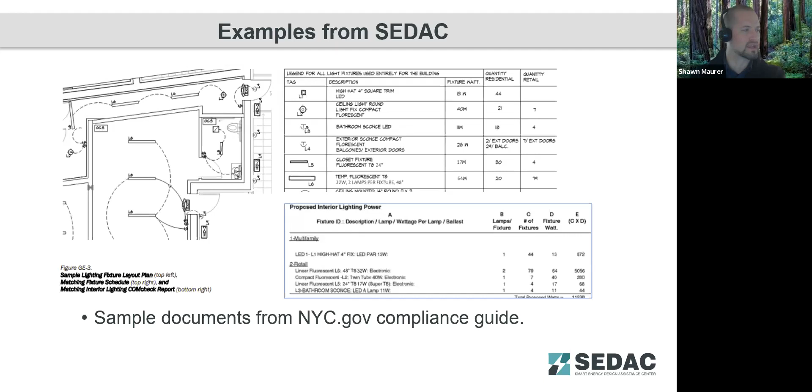This example comes from the New York City's building department. They have a manual that shows a lot of examples of code compliance documentation. In discussing beforehand with Don and Nelson about examples of documentation compliance, we've commented on the resources at New York City where they provide these examples are probably one of the better resources out there for finding good examples of documentation compliance. We have another example here of just envelope wall assembly where they've done the U value calculation, and again showing what their calculated UA is, what they're allowed per the code, and just showing, right there on the plan drawings, it's documented in one place, easy to see.

I don't know, Nelson and Don, if you wanted to discuss a little more in detail some examples where you've seen this on projects that you've worked on, or some further examples. If anyone else in the audience has questions about what should you be including on your plan documents to try to help these code officials process materials faster and more accurately. So what we're really looking to show here are examples of things that are going to reduce callbacks for information and save time in that code compliance documentation process.

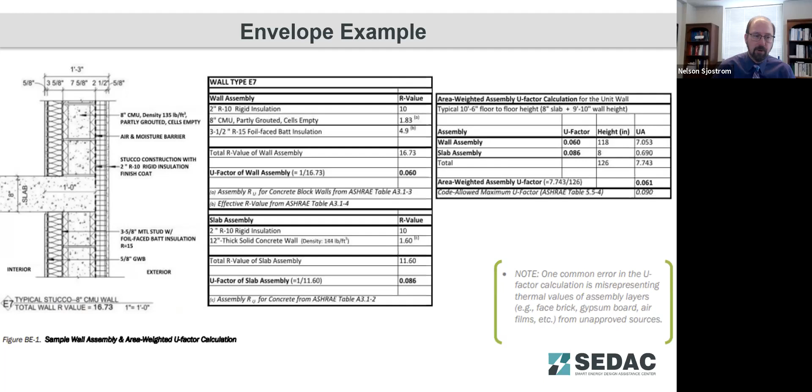A lot of times on these drawings, the challenges come where floors intersect, and make sure the envelope is complete around those intersections. One of the constant challenges is where you got a slab hitting the outside wall, and how that thermal barrier continues along the outside of the perimeter of the building.

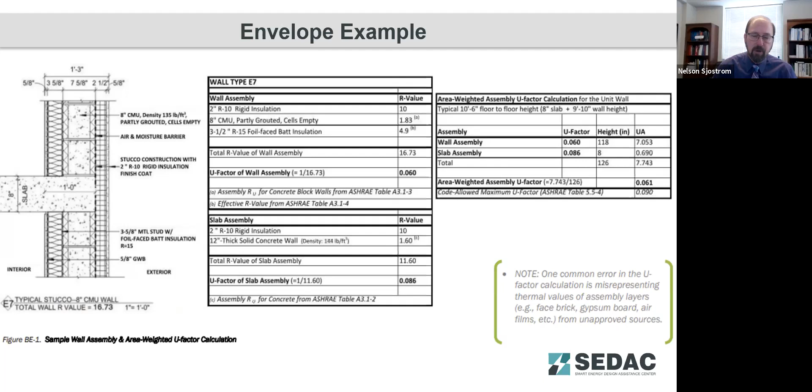So constantly working with architects, trying to get them to figure out how to make that fit in their design, whether that insulation is either inside the foundation or outside of the foundation, and how they handle that. So that is often a challenging part of the plan review, getting through that little intersection.

And follow up there, Nelson, with the exterior, when they do the foundation exterior insulation, to make sure that insulation is covered. I like to look at it on the plan to see how they plan to make the covering, so the UV, and also some of the landscapers come along with the weed whackers and cut them off. So that's a big thing. That's one time I will ask for a detail on the plan review.

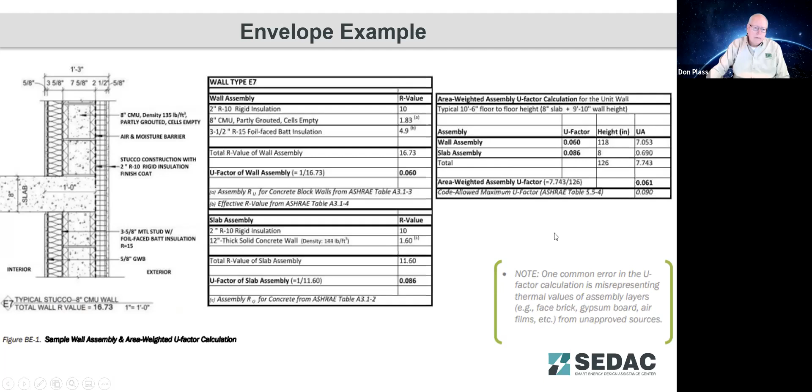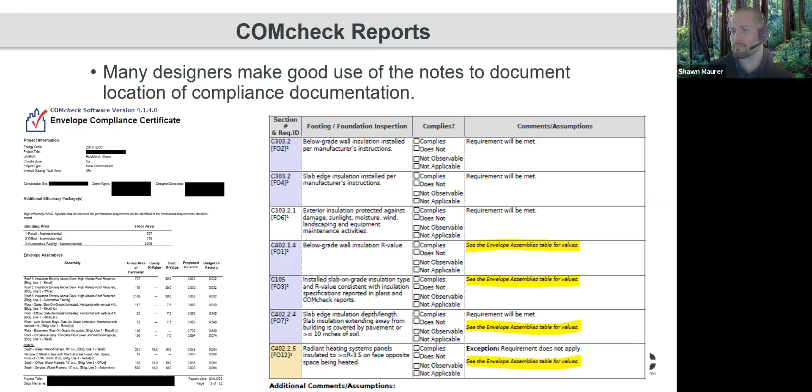Are there any particular areas in these reports where finding that documentation is particularly difficult, where these notes would be beneficial for you more so than any other areas? Particularly in large plan sets. If you got 100 pages and you need to dig through to find it, that can be pretty challenging. So when the architect does you the favor of actually pointing to things, that's very, very helpful and saves us having to ask the questions.

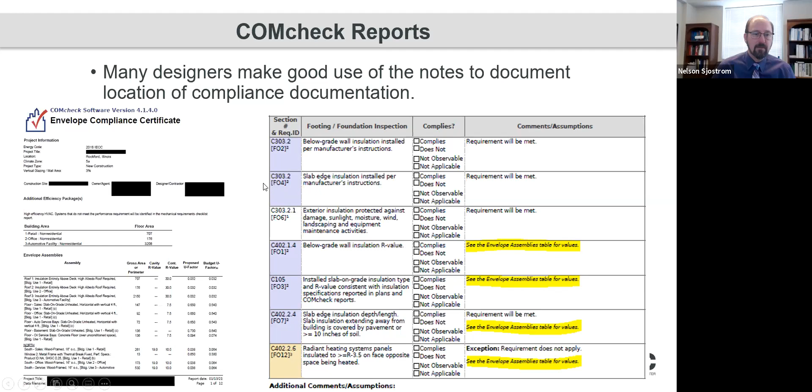All right. The next discussion point we wanted to move into was the commercial energy code process. We did have a question come in. Richard Ang asked, do we still need to include envelope or lighting calcs in the drawings even if you have a COMcheck or REScheck submitted? The COMcheck and REScheck do those calculations for you for the envelope and lighting. Do you still want to see that kind of summary table in the plan drawings as well? Or is that COMcheck summary report all that you would need for compliance?

For myself, I'll look at the envelope compliance. I'll look at the mechanical compliance. I'll look at the lighting compliance and the exterior lighting compliance. And generally speaking, when I've got all of that, I don't expect to see that on the actual construction document itself. But it could be just as easy for them to put it onto it. Biggest thing I'm looking for is if it's actually there.

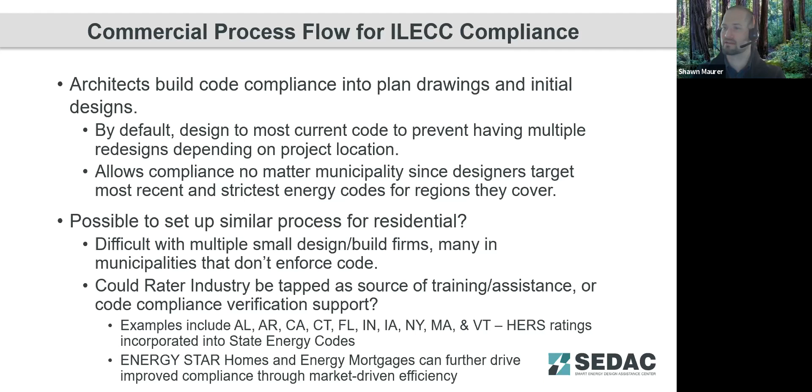So there's a couple of ways that we've found where they've really been trying to build in that process of code design from the start of the design process and let it trickle down into the construction of homes, kind of like we see with the commercial side for compliance. Nelson, I know we had discussed in detail training opportunities, and Don, we've discussed that too, reaching out to home building associations and hosting training sessions with them to inform them about the code and the benefits of compliance. Did you have any comments on that kind of outreach and training that you would like to see on the residential side?

For us, it's really been helpful to partner with you, Shawn, and your staff. As pretty much a larger municipality here in North Central Illinois, we've kind of taken the mantle of being the trainer for a lot of the design professionals and the contractors in our area, as well as other building inspectors and code officials around the area. Prior to COVID, we used to host on-site training and invite different municipalities as well as design professionals and builders to come in for training sessions.

Again, Shawn, your staff was part of that, and we've had other people in to help us do that. So that's a huge help. Hopefully we'll get back to that again as COVID restrictions start lightening up. But just reaching out to the people that are pulling your permits, the design professionals, the contractors, and say, hey, here's what's going on, there's some new stuff in the code you should probably know, and we invite them in. So that's what we try to do anyhow.

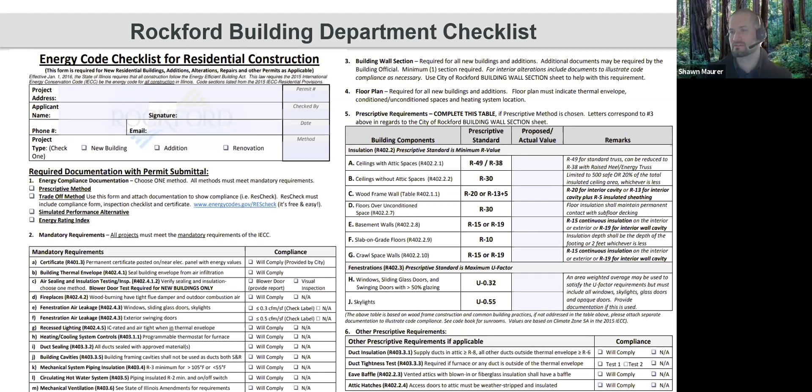Well, you know, this can be the way we got these houses more closed up. They used to just talk a little bit about caulking in the code. Today, what we do is we actually have it so we go around, and we're going to talk a little about air barriers here in a little bit. We're going to talk about how it's sealed up.

Once you seal that house up, you could take a mason jar, clean that mason jar out completely, put a cap on it, put it out on the picnic table at lunchtime. And within about 20 minutes, you're going to start to see condensation inside that jar because it's trapped inside. And a lot of times, if you don't build your house correctly, you're going to have that trapped moisture inside also. And that does get to, whether it's COVID or just having a healthy house, mold or any problems like that.

What we have done is when we close the house up, when we do go to the blower door, which we'll get into a little bit too, you close the house up, you need to have some type of outside air into it. When I was in Hoffman Estates, we had all the equipment to do air changes. We could do a whole house review by ourselves. We had the blower door, the equipment, the duct blaster.

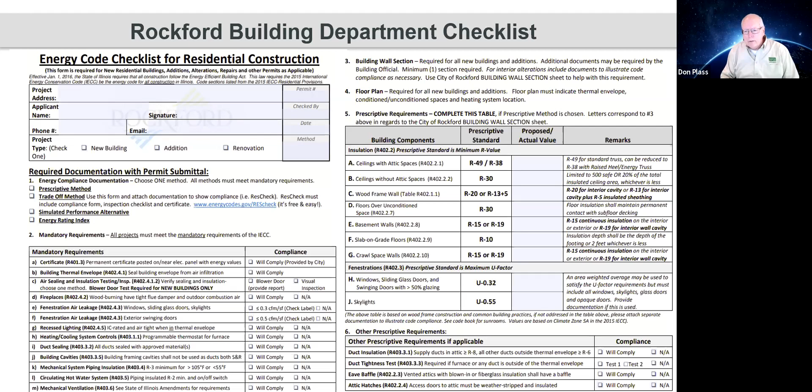We just don't want gaps around the windows, around the doors, at the floor, at the attic hatch, whatever. Those are uncontrolled areas where you get air infiltration. Around the rim joist, that's probably a perfect place. The electrical panel, the cables that come into your electrical panel, even your sump pit down there, if you don't have it covered and closed off on top, you're going to get air infiltration into your house, and you do not know where it all comes from. You might have 11 air changes per hour or something, and you get it down to 5, but now you need to put that exterior air in there.

And a lot of the builders, what they'll do is they'll use the return ductwork, and they'll go to the end of the ductwork, and they'll end up going out to an exterior hole, and they can have either a Honeywell type of flapper valve in there to be able to make the amount of air go into the cold air return. It's tempered by the time it gets to the heat exchanger, and it'll be warmed up and everything. So you'd have outdoor air at that point where it's bringing it in, and it's making it so the house is friendly for an environment. You can get a house too tight, and you can get a house that's very sick from that.

We did have someone post an analogy in the chat: breathe through your nose and mouth, not through your skin. It's a really good analogy for building systems. So yeah, buildings are getting tighter and tighter, but you want them to breathe through the mechanical system where you can precondition that air and send it into spaces where it's not going to be causing comfort problems. You're not going to have humidity problems. You're not going to have condensation issues within your wall assemblies. We haven't seen a lot of concern about sick building syndrome from buildings being tighter yet, because the code also has built in those mechanical ventilation requirements.

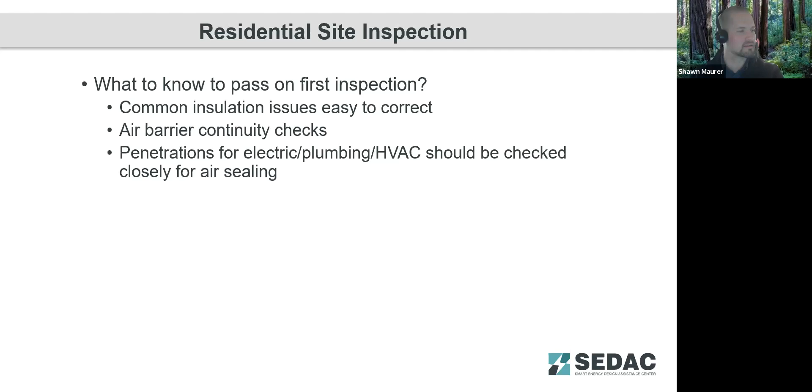All right, we got a couple questions. We'll get to those at the end. We do want to touch on our residential site inspection materials real quick. Just what do you need to know to pass that first site inspection so you don't have callbacks, you're not expending that time to have the code official come back out and re-verify corrected details. So we wanted to go through some examples of common issues that we've run across. Don and Nelson, as I go through these pictures, offer up comments or past examples where you've seen these yourselves. Probably the one that I have seen the most is not continuing the drywall down behind tubs and basins on exterior walls.

That's kind of why I put this one first. With that tub assembly being open to the wall cavity on the exterior wall, since it's hollow underneath, that opens up a bunch of interior wall cavities now to any air leakage that comes into that outside wall. So it's very important to have that continuous air barrier all the way down the exterior wall that isolates that volume around the tub basin from that exterior wall cavity.

And the other thing I've run across is with face stapling insulation. That face stapling covers up a lot of issues with the insulation detail behind that paper. So when I was doing residential inspections, I would always spot check, pull open that face stapling in a couple of places where I saw wires coming out through the top plate or something like that, and check to make sure, did they split the insulation properly around the wires or the plumbing? Did that insulation actually fill that cavity all the way? So important to catch those little details.

You know, and Shawn, that's great that you pull in for the full air barrier behind the tubs or showers, whatever it is, when you're on an exterior wall out there. If somebody's just building new in here, they probably wouldn't think about that. We put the insulation in there, but they want the air barrier there for a reason. The other part is your second one there, you have the wire in there, and you haven't cut around it.

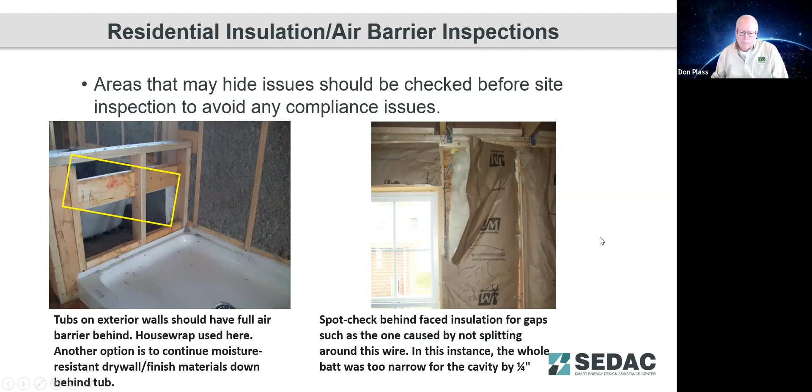And then the last thing I wanted to touch on, since a lot of builders now are using spray foams as their air control layer, is getting the proper depth of that insulation to ensure that you are in compliance with the air barrier material. With open cell foam, that 4.5 to 5.5 inches of foam is going to qualify as an air barrier. And with closed cell, it's going to be that 1.5 inches or so. Don or Nelson, did you run across any of these common issues, particularly with spray foam insulation? I've heard a lot of comments about spray foam insulation.

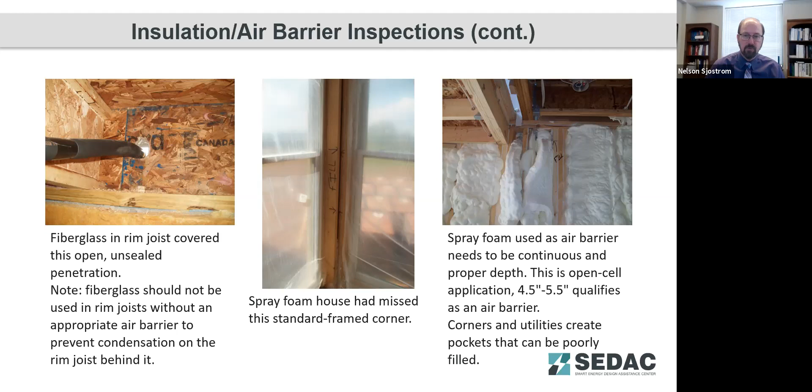Of course, challenging spots you always run into are where soffits hit walls or cantilevers. Those are always challenging spots to get properly insulated. Most of our residential winds up being done by local insulation contractors, so there's been a lot of education between them and my inspection staff, but those are challenges. Trying to figure out where those questionable spots are going to be based on the design of the home.

Another one that I've run across a lot is that attic access hatch in homes. I've been in a lot of older homes where you open that access hatch and all the insulation falls down on your head. So make sure not only that you have those retaining walls in place to hold that in place, but this needs to have an air barrier, air seal on it. You need some weather stripping on there, something that latches that door in place so you've got a good air seal. You're not going to have your home's air wafting up through that access hatch and then condensing on the inside of that, causing mold and deterioration of those materials.

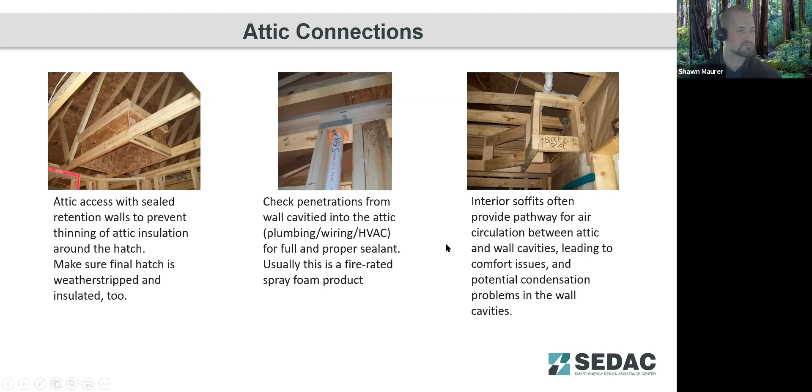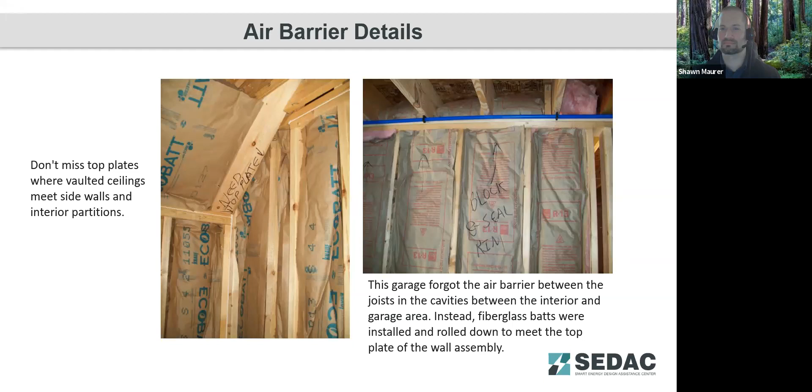And then lastly, some things on ventilation. Exhaust fans: to make sure your exhaust fan is actually going to meet its design airflow, you want the exhaust duct as short and as straight as possible, coming out of that exhaust fan straight to the outside wall. Every time you put a kink or a curve in, that extends the duct's effective length and adds frictional loss, and you could end up with an exhaust fan that isn't moving the airflow it's required or designed to move. The other thing with flex ducts is making sure you don't have sharp kinks that restrict airflow in that ductwork. So a couple of things to consider there for ventilation.

We've had a couple more questions come in. When introducing outside air into a furnace unit or return duct, what volume of air should it be designed to, and how does one control that volume? I believe we've had questions before asking whether intermittent exhaust fan use, like a kitchen hood or a restroom, gets included and has to be adjusted for with that mechanical ventilation, or is there a fixed design volume?